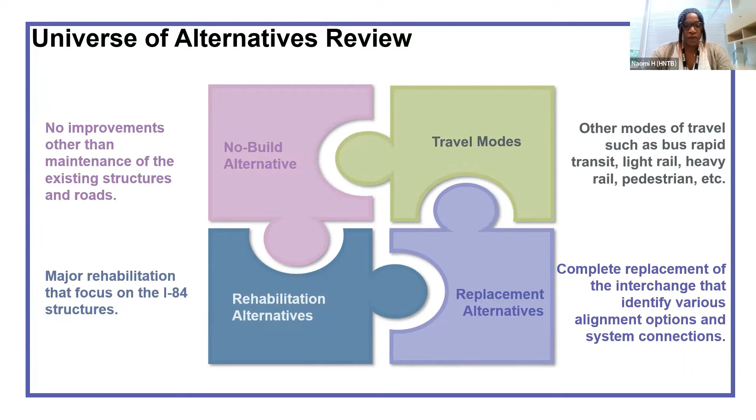23 alternatives have been identified in the universe of alternatives. As a group, we went through the features of each of the four groupings, highlighting opportunities, challenges, constraints, and considerations made in developing this universe. This resulted in many similar alternatives and some with very unique features. As David will describe, these alternatives were looked at somewhat like a Mr. Potato Head aspect, where you can add, subtract, mix and match certain features to develop full alternatives.

As the PEL study progresses, we will go through each of these alternatives in more detail. Today's meeting will focus on the alternatives that failed to pass this first level of screening. I want to remind everyone there will be two additional levels of screening after this one, and the public will also have a chance to provide input. These 23 alternatives were further broken down into more similar groupings, which we'll highlight as we get through this presentation.

The level 1 analysis was engineering based. We wanted to focus on the improvements possible for the identified deficiencies, the needs we identified, and the feasible solutions - the purpose of the project. We asked: can this conceptual alternative satisfy the purpose of the project, and are there any fatal flaws? We took the purpose and need, the transportation portion of it, and used this as the first gut check of the criteria. The potential community and environmental impacts many of you are interested in will occur in the two subsequent levels, but this initial level was purely engineering based and will be pass or fail.

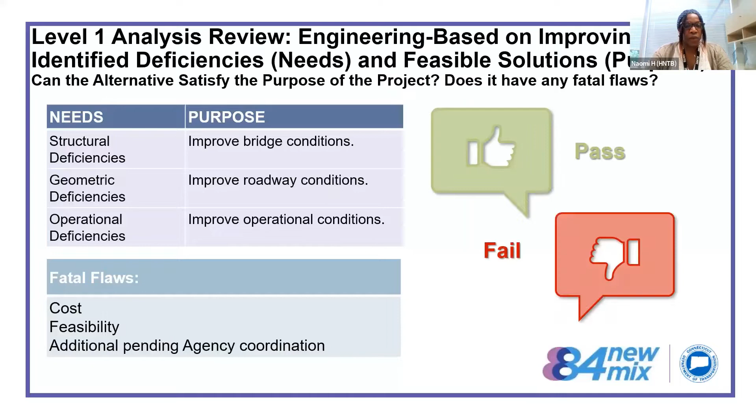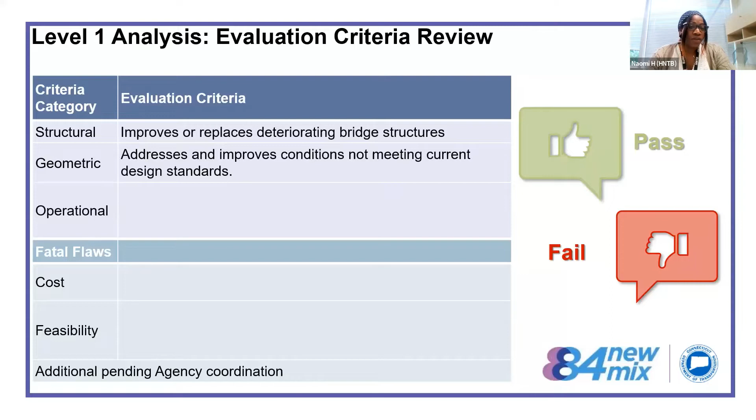The project team took the purpose and need and translated them into evaluation criteria. Beginning with the structural criteria, we evaluated whether the alternative improved or replaced the deteriorating bridge structures. For the geometric criteria, we wanted to make sure the alternative addresses and improves conditions that do not meet current design standards. For the operational criteria, we wanted to make sure the interchange would function with current traffic and future traffic projections.

So those high volume movements would be direct connections, meaning that you can go to either main line without needing to take an exit and use the local road network. The lower volume movements would be indirect connections, where you would use the local road network to make those connections. We also identified fatal flaws, and those fatal flaws were cost and feasibility.

I want to highlight that we have an agency coordination meeting tomorrow, where we will meet with federal and state agencies to get their feedback on any fatal flaws or additional goals and objectives that we can look at in the next subsequent screening levels.

For cost, we just wanted to make sure that financial resources could be made available for the alternative. And then for feasibility, we looked at if the alternative could be constructed using proven technology and techniques, general constructability aspects, as well as making sure that traffic could be allowed to operate during construction.

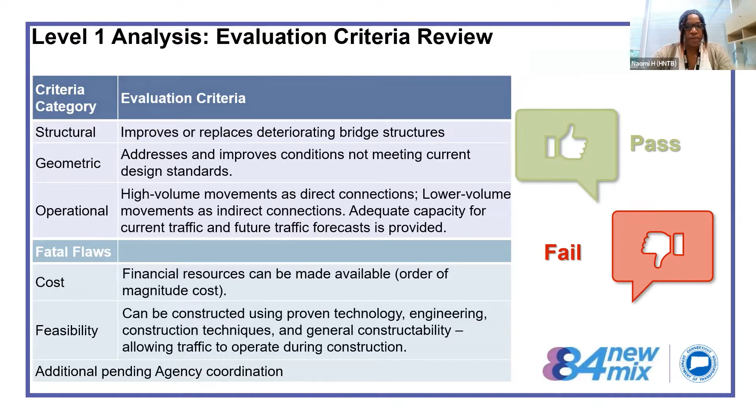So we'll get into those preliminary screening results. These are preliminary, not final, until we meet with the public. The PAC is ahead of the public, as you help us refine the information and present that key information to the public as well.

So 23 total conceptual alternatives were identified in the universe. 13 of those conceptual alternatives are proposed to be dismissed at this first level of screening, meaning that they failed to address the transportation need or are fatally flawed.

9 alternatives are proposed to advance, and these alternatives at this very early level appear to address the transportation need and are not fatally flawed. Those will move on into the next level where they will be further developed, more than just conceptual.

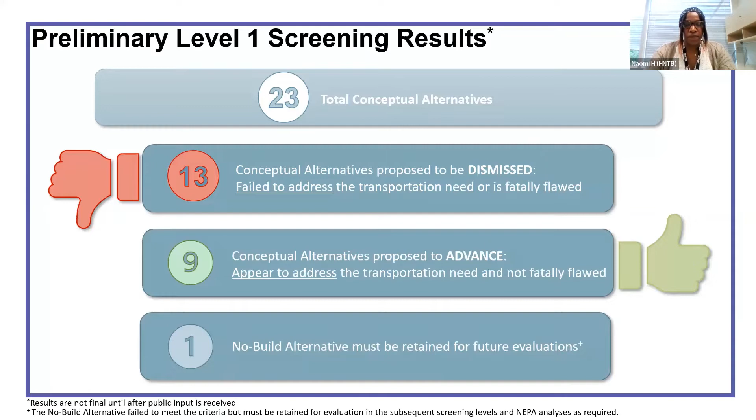So here are the screening results, or the groupings for the level 1 universe of alternatives. We've identified 4 major groupings: the no-build, travel modes, and the major I-84 rehabilitations. And then we have the replacement alternatives, which were broken down into some smaller groupings.

Reconstruction in place, full system interchanges, partial system interchanges, ground level options, and also bypass alignments. This is a sneak peek of how the alternatives will be grouped together in our level 1 report, and also on the website when we can put these up for additional public input and feedback.

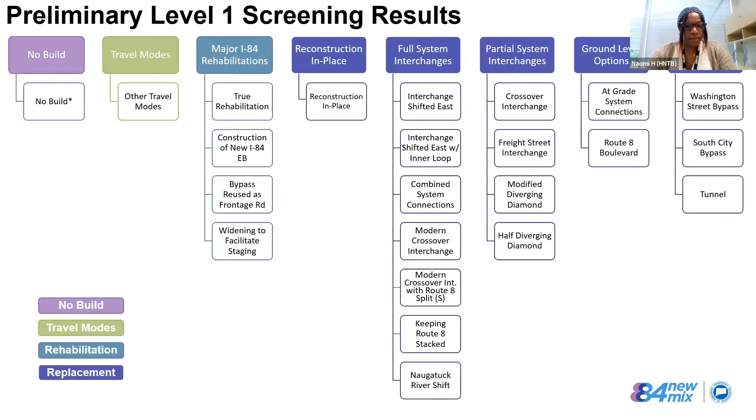Just as a reminder, any fail at this level of screening means that the alternative is proposed to be dismissed from further evaluation. I want to highlight that if it is dismissed at this level, we would not be seeing the alternative again in a future level of screening. So as we get into the core of the presentation, keep that in mind, and feel free to ask any questions about these alternatives.

Again, being in the PAC, you're slightly ahead of the public, so these are not final dismissed alternatives yet, but we are proposing for the ones that failed to be dismissed from further evaluation.

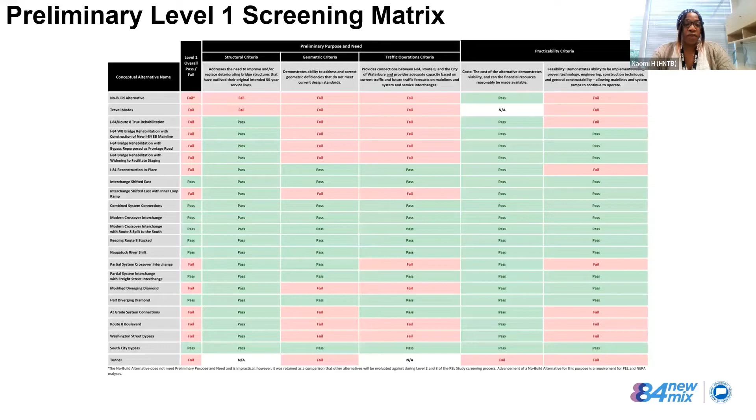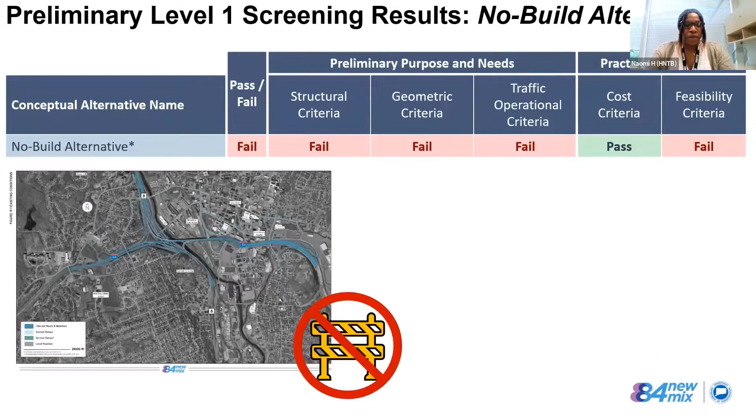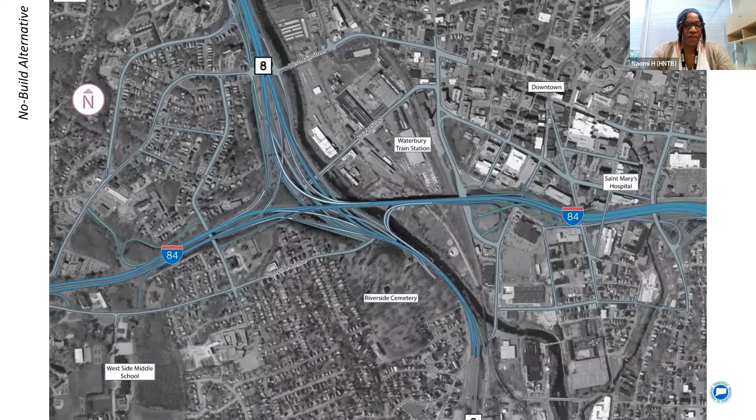To get into our results, I want to start with the no-build alternative. Again, the no-build is the existing interchange, no construction other than general maintenance activities will occur. If we zoom in on this graphic, it is just the interchange as it exists today. Nothing really changes. All of the deficiencies we've identified will continue to operate in a less than ideal manner. This would be our baseline condition, with no improvements of deficiencies.

As you can see, it failed to meet our preliminary purpose and need, and it also has some fatal flaws for the feasibility criteria. This no-build will be retained for further evaluation and subsequent levels, just for comparative analysis against any potential alternatives that continue to move forward and appear to be viable and reasonable.

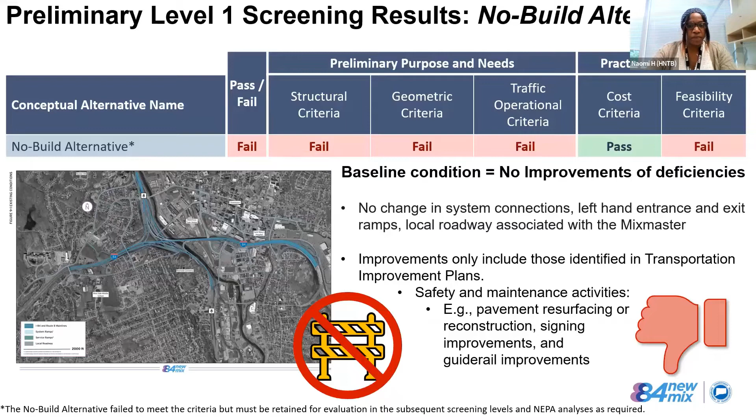Moving on, we have the travel modes. This includes bus transit, rapid transit, light rail, heavy rail, additional bus lanes, and pedestrian bicycle access and things like that. We want to highlight that the project team is aware of a lot of the government proposal directives and initiatives to reduce vehicle miles traveled, which could result in fewer cars on the road.

We want to highlight that Waterbury in this area is in a very unique situation, and this is a transportation project. So while a lot of these travel modes are a fail for the preliminary purpose and need statement and the feasibility criteria, I want to highlight that these other travel modes will be considered as potential complementary features. This is part of that Mr. Potato Head type of thing, where we can incorporate certain aspects into an alternative or support certain transit modes of travel in an alternative and move it forward, but it doesn't alone improve the deficiencies we've highlighted.

So while some reduction in congestion could be a possibility with additional modes of travel, we don't see it as actually fully satisfying the transportation needs in this area. But as I mentioned, it could be incorporated as a complementary feature for whatever the new mix ends up being.

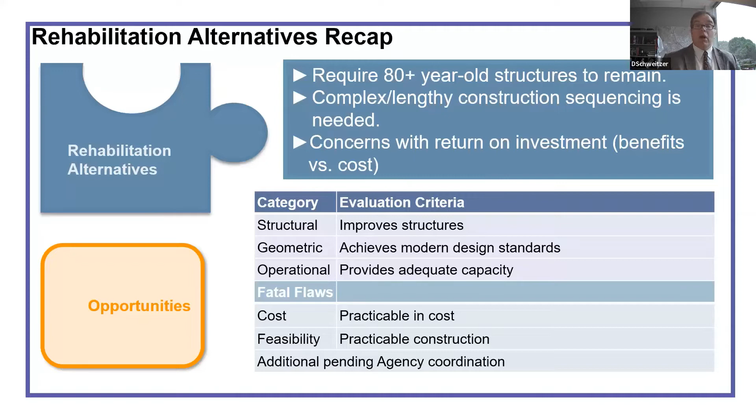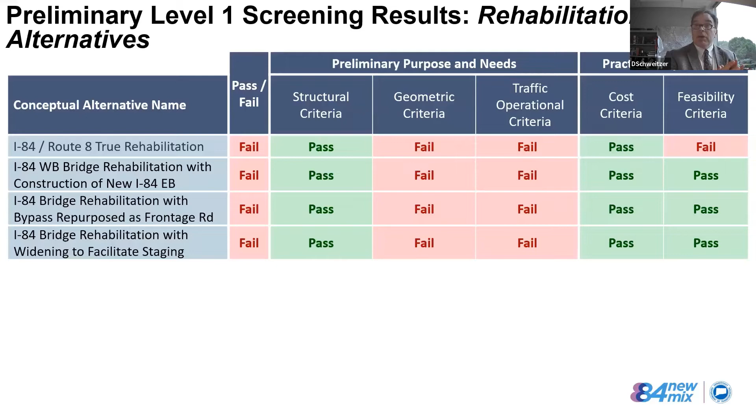Now as we get into the first alternate - oh, I'm sorry, we'll look at the recap of them. So here are the four of them. You can see their report cards, and we're going to get into each one of these four starting right now.

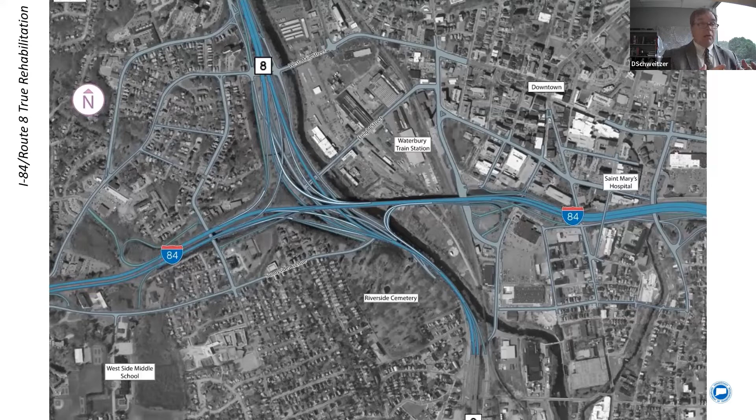The first one we're going to look at is the true rehab. What this will do is we will not be building new structure - you're looking at the core, we will rehab what is there, and at the end we will have the same project, the same footprint we have today. So while the structures will be improved, that being the concrete decks plus some steel and concrete repairs, we are not going to be making any geometric improvements, and we will not be improving the traffic operation.

So our level of service will still be at the same spot we were at, and we will experience a lot of delays during construction. So as you look at this report, you can see we fail on the geometric, our traffic operational, and the feasibility criteria is based on those traffic disruptions we'll have during construction. So this option was viewed as a fail.

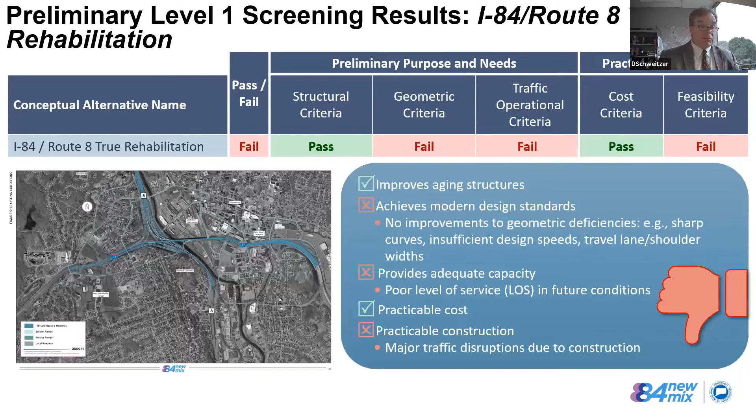The next option that we looked at was the I-84 westbound rehab while building a new I-84 eastbound.

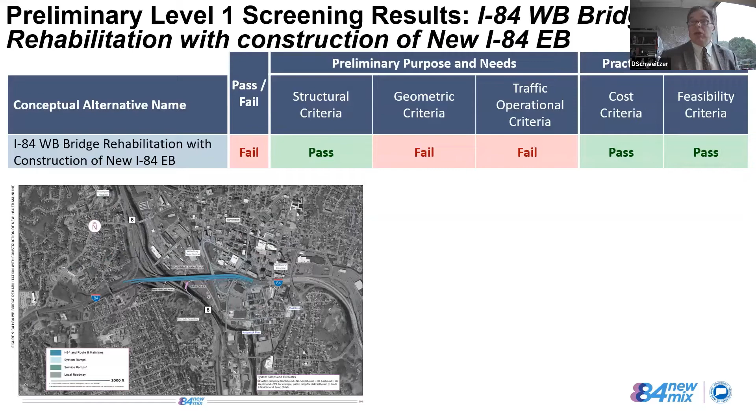As we zoom in on this, if you look at the cross section in the lower left, you can see that we have built a new eastbound barrel at the same elevation it is at today, to the south, so we'll be unstacking the bridges. This new eastbound structure will be overbuilt so it can handle bidirectional traffic during construction, so we'll put both eastbound and westbound up there.

Then we'll be able to remove the upper level of the existing structure and rehab the existing westbound, then return traffic as shown here, with eastbound on the new structure and westbound on its existing structure. So if we look back at the report card on this,

you can see that in the westbound direction, we're still going to have the same geometrics that are out there today that do not meet the modern criteria. We'll also have poor levels of service on the westbound. While traffic-wise, our constructability and maintaining traffic, there's a better plan in place for that.

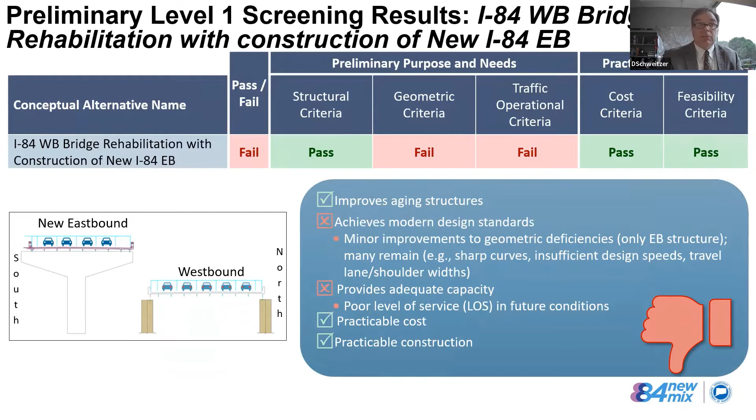This is still going to fail due to the geometric and traffic operational criteria. Okay, the next option to look at is the I-84 bridge rehab with a bypass roadway built, then repurposed as a frontage road.

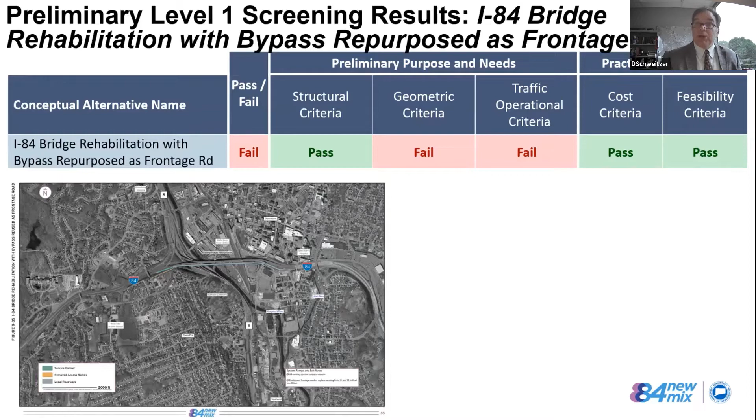As we zoom in on this, if you look at the cross section in the upper right-hand corner, what we look to do is build a bypass road to the south to handle the 84 traffic. And then we would put both the eastbound and westbound traffic on the structure while we rehab both eastbound and westbound bridges.

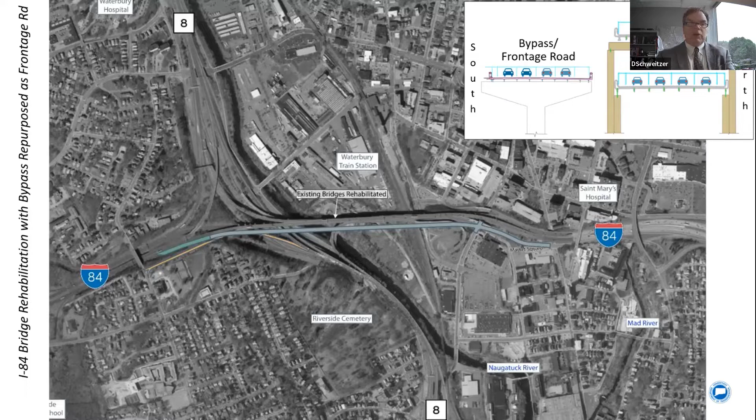Then at the end of the project, we would move the eastbound and westbound traffic back over to the existing structures. This bypass road would be converted to an eastbound frontage road where we'd take all the local traffic off and bring it down, in essence replacing exits 21 and 22 by having intersections with both Bank and then terminating at South Main Street.

So if we look at the report card on this, what we get is that yes, we're improving the structures because we're replacing those decks, but we're not designing to modern design standards. We're still failing geometrically, and we'd be back to our same levels of service on both the eastbound and the westbound. So this alternate is looked at as a fail.

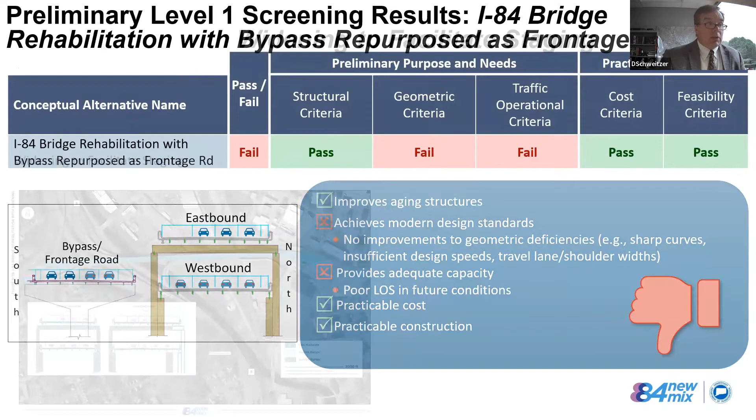The last rehab option that we looked at entails widening the structures to the north side so we could rehab them and stage our construction across.

So if we zoom in on this, you can see the existing conditions on the left side and what our final proposed conditions would look like on the right side. What we are doing is widening to the north side, extending out the stacked condition so that we can remove the upper portion of the existing northerly columns that are there.

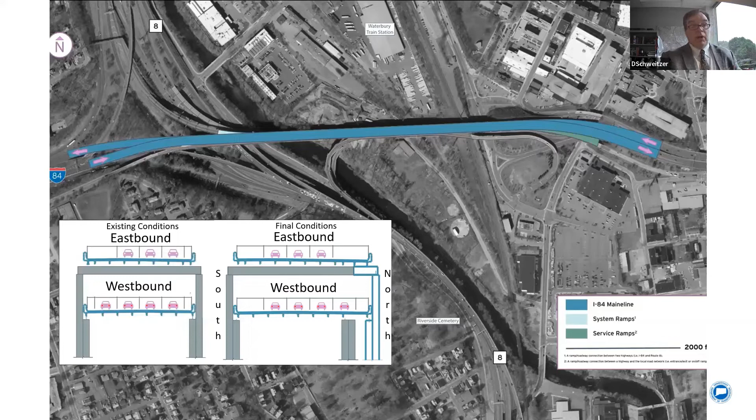We'd be able to build another full lane of traffic, and then we would stage our construction as we worked across rehabbing the bridge, so we'd have a lot of construction phases to be able to complete this. So now if we go to our report card on this,

what we are finding is that we're only making some minor improvements to our geometric deficiencies. We're not correcting all of them, so this would still be looked at as a fail. And from our traffic capacity, we're still not providing the adequate capacity. We have failing levels of service, so this is also viewed as a fail.

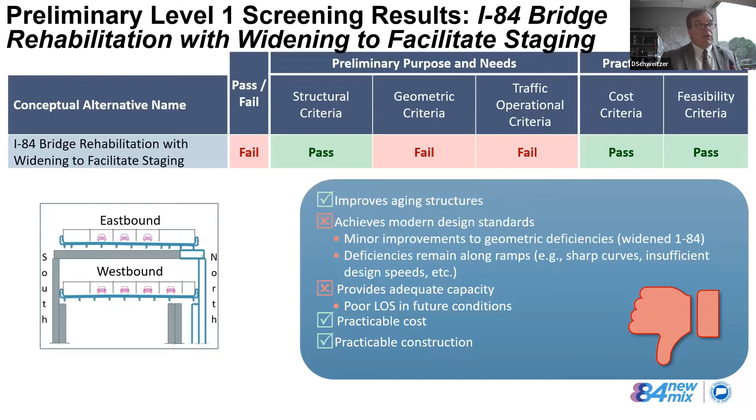So our next slide is looking back at these 4 rehab alternates. Just to stress, these rehabs are for all the bridges within the interchange, in both main lines and the system ramps, but we are focused a lot more on the I-84 structures as these structures have not had the decks replaced. As we came out, you can see that all 4 of these failed, mostly on the geometric and the traffic operational criteria, where they got failing grades.

While the structures are improved, the steel that is out there will only be patched. Consider it as a Band-Aid type of situation where we'd have to go back and continually maintain that steel. We don't really know how often yet, but the existing steel would essentially remain for these rehab options if they were to move forward, and that would result in some concerns, as David mentioned earlier, with that return on investment for these rehab alternatives.

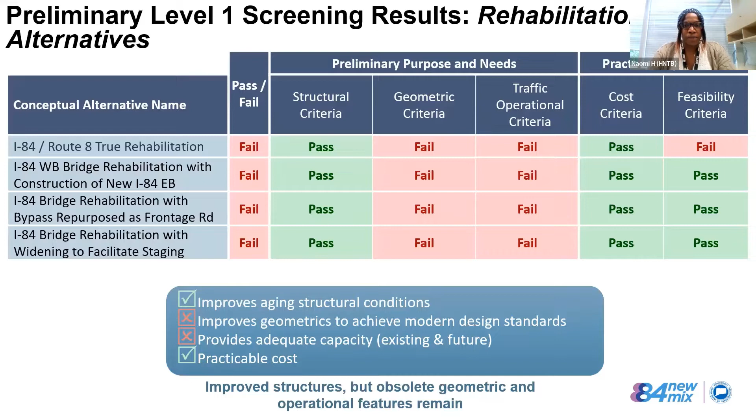Now we'll get into the replacement alternatives. Again, these are 8 of them that failed. One thing that goes on with these replacement alternates: we're looking at complete replacement of the I-84 and Route 8 structures. With those new main lines and new structures, we have all new connections, so we can get rid of those left-hand on and off ramps, and we can get rid of some of the sharper curvature and bring these up to modern design standards. So when you look at the needs and goals we have for this, we have a lot more opportunities to meet them.

Now, as we go into these replacement alternates, as designers we still have our concerns, constraints, and considerations as we go through this. Remember, we still have that high ridge line on the west side. We have the Naugatuck River, the Mad River, the rail line. You have to keep this topography in mind, and then other features, such as Union Station or the historic Riverside Cemetery, are all considerations for the designers as we go through this.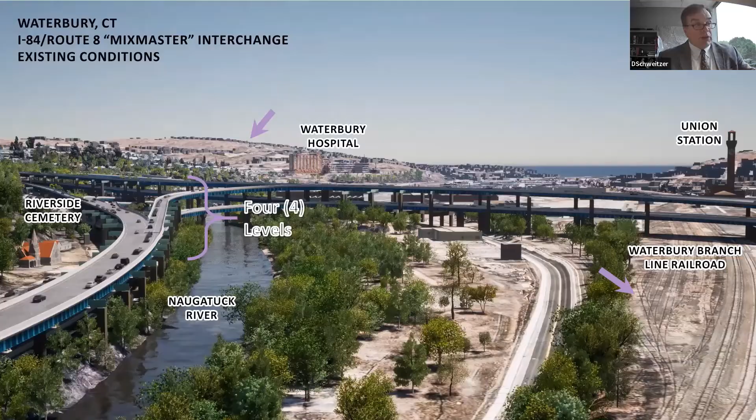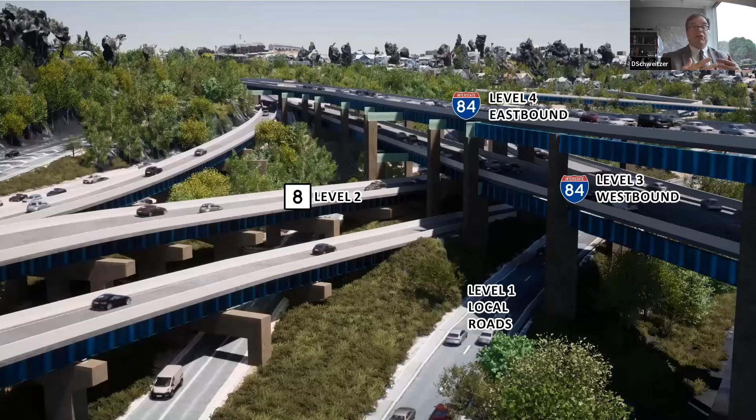One other thing to consider as we zoom in on the structures: remember the existing is a 4-level structure on this interchange, which helps separate traffic and makes all the existing movements possible out there. So these are all things as designers we were weighing while laying out these alternates.

Remember, with these alternates, everything is on the table. Nothing's been dismissed. Some ideas are tried, looked at, and evaluated, and they can fail out. As Naomi put it, it's like a Mr. Potato Head approach, where one feature looks great and we're going to advance that. Other features are looked at, analyzed, and then dismissed, and those aren't used again. So these are the 8 that we're going to look at.

You can see the report cards here, but we're going to get into each one of these individually right now, and there'll be things I'm explaining as we go through. If there are questions, please ask, pop it into the chat box—Naomi or somebody else will gladly interrupt me and we'll answer your question.

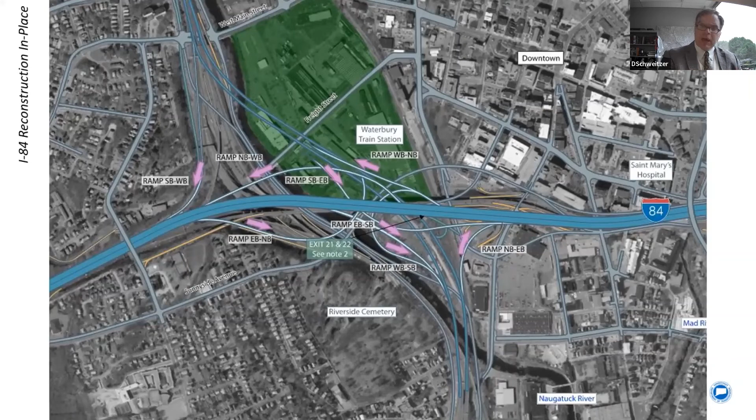The first one we're going to look at is I-84 reconstruction in place. If we zoom in on the core of this interchange, what we're looking to do is build I-84, unstack it, but build it back in its original footprint so we can minimize the amount of impacts and stay pretty close within the right-of-way that we have. What we're finding is that if we unstack this and build where we're at, we would have to find a way to handle this traffic—that was a big problem we had when looking through all the rehab alternates, how do you handle this I-84 traffic if you have to replace it? In this situation, we have to remove the existing viaduct in order to build the new one back in.

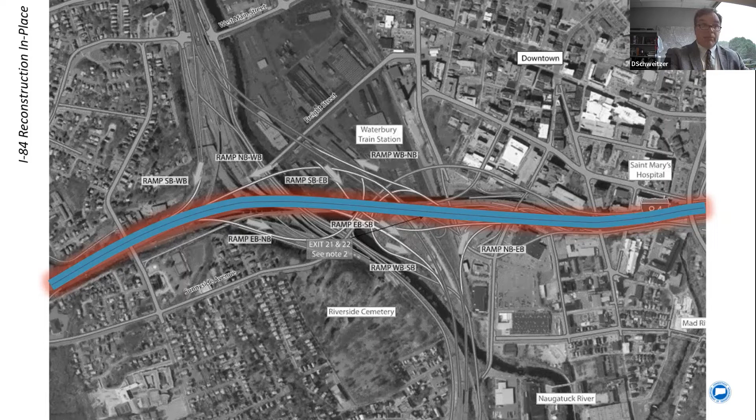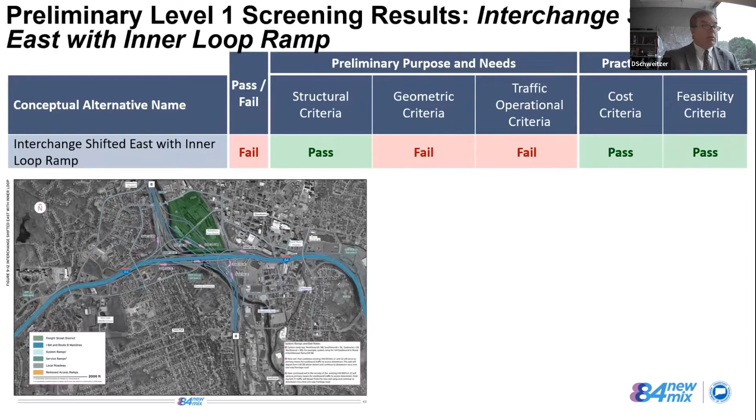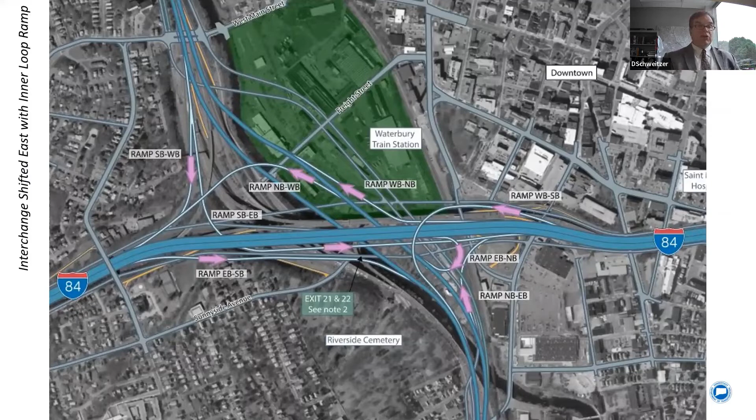Moving ahead to the next alternate: this is the interchange shifted to the east with an inner loop ramp. If we zoom in on this, at the core of the interchange we're showing I-84 constructed to the south of existing, so we can maintain the I-84 traffic on the existing structure. Route 8 could be maintained on its existing alignment as it's shifted to the east. It would still be a full system interchange with right-hand on and off ramps, but one thing we were looking at is the system movement from eastbound to northbound.

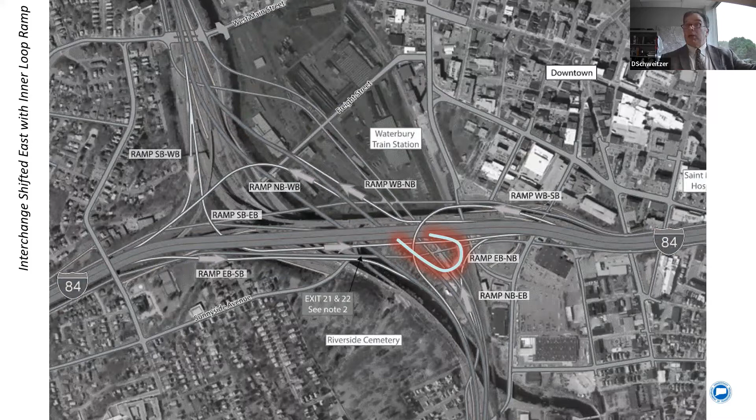As that exists today, that's a flyover movement, which means we go up a level over 84, and we have a lot of structure to carry it up to get up to Route 8 in the north of I-84, near the West Main Street area.

So what we looked at is a feature where we could take a right-hand off ramp and get an inner loop, meaning we take a tight radius ramp to pull it back and make that maneuver. So what we were finding is that, even though we were looking to save a lot of structure and make this a more feasible project, that inner loop ramp impacted the geometric operations on 84, and the tightness of that curve due to the constraints would not meet the geometric criteria.

So if we go forward to our report card, you can see that due to that inner loop ramp, this did not meet the geometric standards, nor did it provide the adequate capacity. So this option was looked at as a fail. Now, there are a lot of features with this that you will continue to see as we move forward and show some of these other alternates that were good features. This was just an alternate where it was looked at to see if there was something better that could be done, or something else that should be looked at on a certain movement to see if that improved the overall interchange.

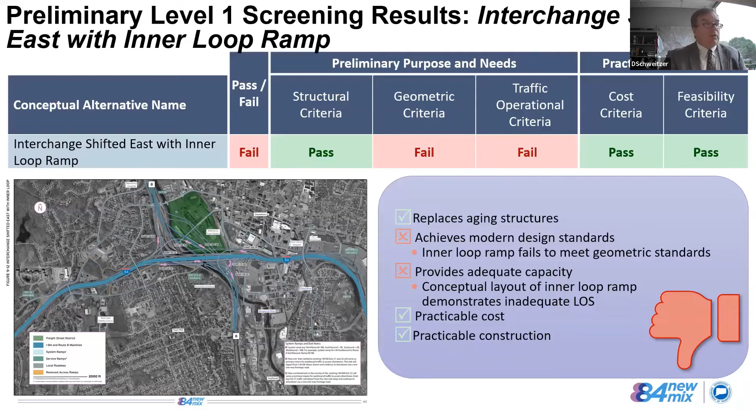All right, moving forward. We're going to get into the partial system crossover interchange.

As we zoom in on this, just a reminder, since it's been a number of months since we talked about these different features, this is a partial system crossover interchange. Now, what we're talking about there is the system movements. We have what are called our outer quad movements, which are system movements that connect mainline to mainline but don't have to cross a mainline. You can look at the northbound to eastbound movement -- it goes from northbound to eastbound but doesn't have to cross either 84 or Route 8 to complete the maneuver. So we don't consider those 4 outer quad movements.

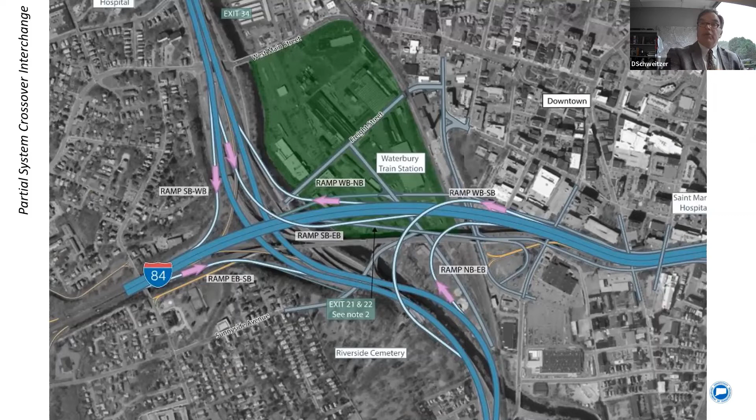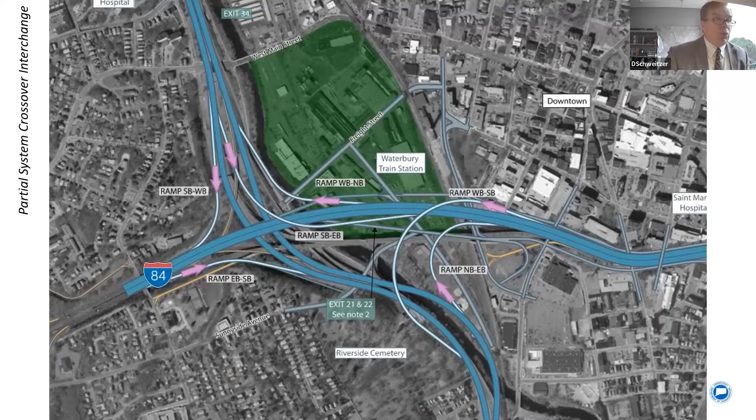What we're really focusing in on is the system movements that have to cross over or under Route 8 in order to make the connection to their destination. And 2 of the ramps here -- the reason this is called a partial system crossover interchange is that when we look at the traffic volumes, you have movements like the westbound to southbound or the southbound to eastbound, which are heavy traffic movements and couldn't be brought down to the local level. So they had to be direct connections. So what we're really looking at here is the eastbound to northbound or the northbound to westbound movements.

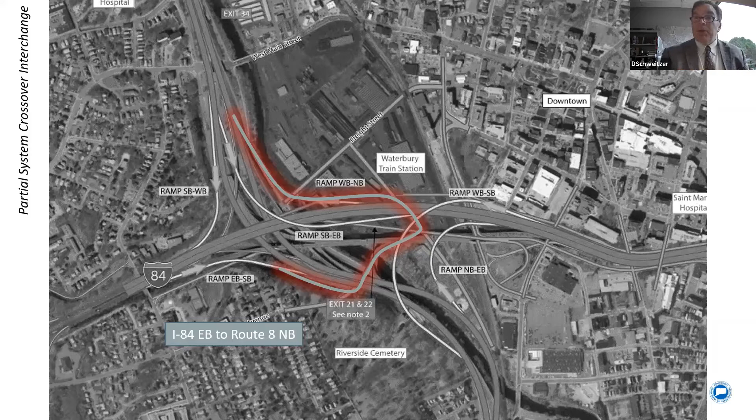And what we're finding is that when we brought this down to the local level with these 2 movements, the traffic operations would fail. Now, one other feature I wanted to point out is that with this option, we looked at constructing I-84 to the north of the existing structure. In addition to some additional right-of-way impacts, we're also finding that there were issues with the constructability on how we could make this work.

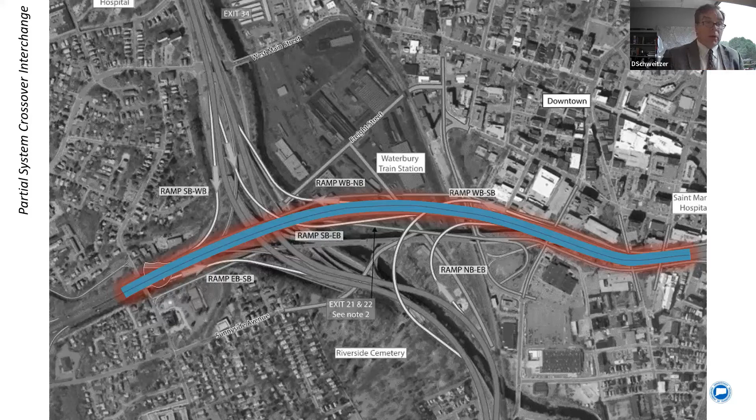So if you go back to the report card, we found that the indirect connections and using the local roadway network to complete those connections did not provide the proper level of service that we needed for the traffic. And also this moving of, or rebuilding, I-84 to the north -- unstacking it and building it to the north -- resulted in some constructability issues. So overall, we found that this alternate failed based on those 2 criteria.

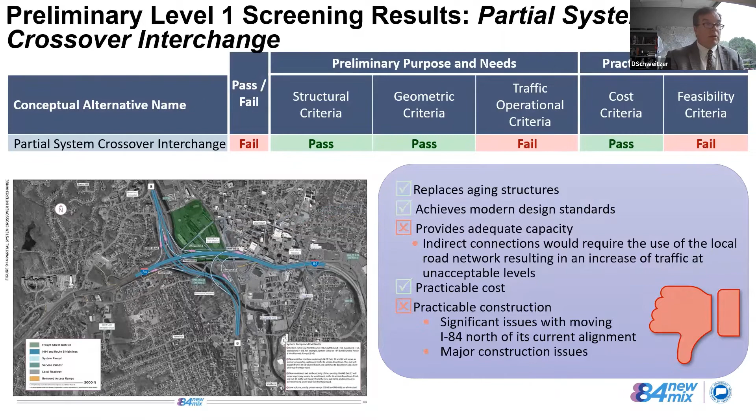All right, the next alternate -- and I think we're going to have a little bit of a video on this when we get there -- but this is on a modified diverging diamond. As we zoom in on this, a diverging diamond is a relatively new type of interchange that was brought forward, and it's a little bit counterintuitive because you get contraflow. As you can see here, you'd be shifting over to the left side of the roadway as the video is playing here.

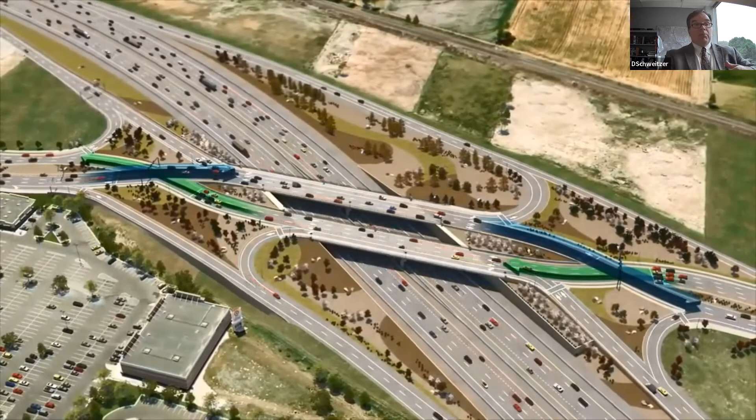And what this would do is reduce the amount of signals or traffic control you would need in order to complete an interchange, because instead of a left-hand movement across traffic where you'd have to wait for a clearance or have a protected movement, by flipping to the opposite sides of the roadways, your left-hand movements now become more free flow.

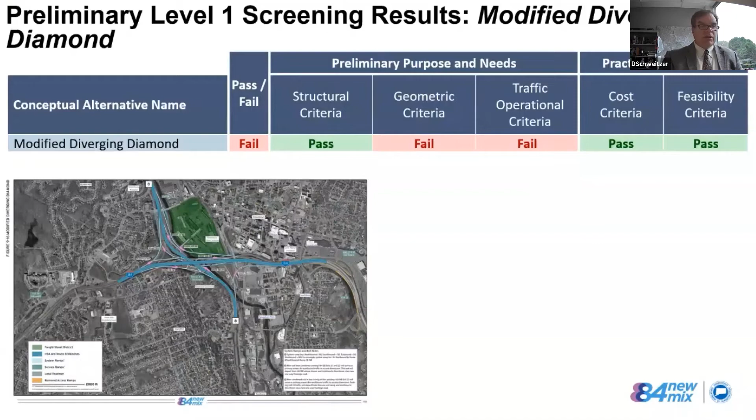So if we zoom back to look at the core of the interchange, what we're finding is that with this modified diverging diamond, that's because we could not do this with the actual main lines. The actual main lines would be through movements. What we're looking at is the 4 crossover system movements. The outer quad system movements would remain as direct connections, but we'd look to take these 4 crossover system movements and bring these into this diverging diamond type of alignment.

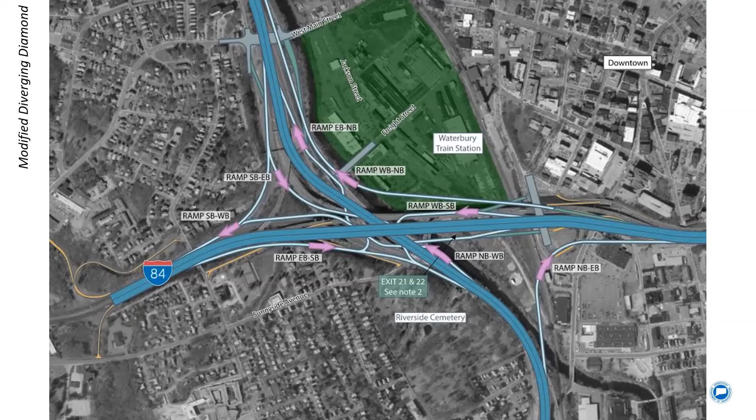And what this was finding then is that we would have traffic signals being installed at the intersections of these system connections. And as we talked about in the previous alternate, where we had a partial system interchange, because we had 2 of the movements that had very heavy traffic flows, that is where we were finding this option to be failing. Those heavy system movements, specifically the southbound to eastbound and the westbound to southbound movements, we would get a very poor level of service on these system movements due to this type of alignment.

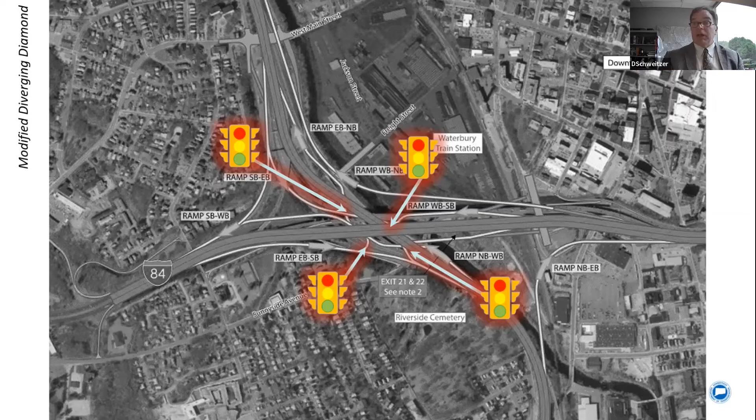So if we look at our report card, what we're finding is that this DDI, or diverging diamond interchange, the geometry of some of these ramps would not meet current design standards. We also found that the level of service or our operations would fail due to the heavy volume on 2 of these system movements. So therefore, while it's a newer idea and something that needs to be looked at, our analysis showed that this failed.

All right, just checking to see if there are any questions. There's a lot to digest on that one there.

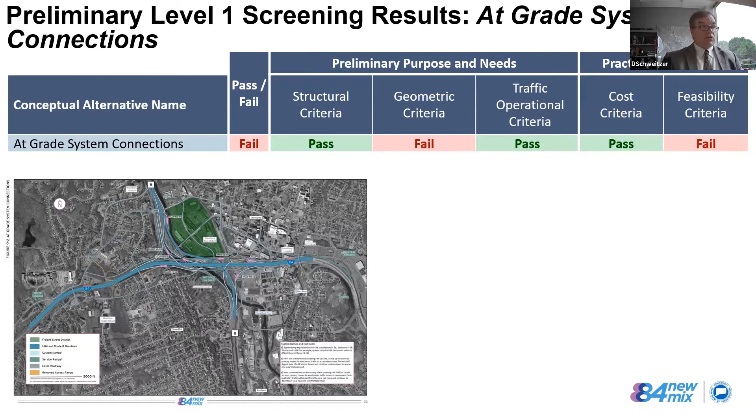So the next one that we're going to look at is the at-grade system connections. So as we zoom in on this, again we're back to looking at the core of the interchange. And again, you're going to notice we're building 84 to the south of existing. That seemed to align properly with how the roadway gives us our best geometrics. And we found that it met our structural criteria that we had. And with this, we have our outer quad movements, our system connections still taking place.

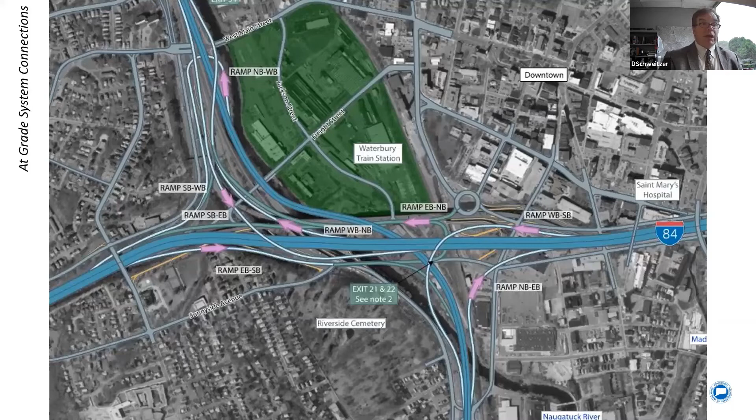You'll find that the heavier system movements that we found, particularly the southbound to eastbound and the westbound to southbound, are also direct connections in this due to their traffic volumes. But again, it's those 2 other system movements that have the lower traffic volumes, the eastbound to northbound and the northbound to westbound movements, that we looked at to bring down to the local level and try to see if they could be combined with the local traffic and give us good traffic operations.

And what we are finding is that the Route 8 northbound to I-84 westbound, we'd be installing what is called a Texas U-turn movement, which, as it's highlighted up here, would take place just before the intersection with West Main Street. And with any Texas U-turn, what you do is you exit your traffic to the left, so you're not bringing them up to the traffic control.

So they would get a free flow movement off of the roadway, and then they would get a left-hand merge. In this case, they would be onto the system movement looking to get onto westbound. So then they would get a left-hand merge onto the other system movement. So what you're trying to do is take that movement and avoid bringing them through the traffic controlled intersection, to give them free flow movement. So that is what a Texas U-turn is. So we looked at the function of a Texas U-turn with that movement.

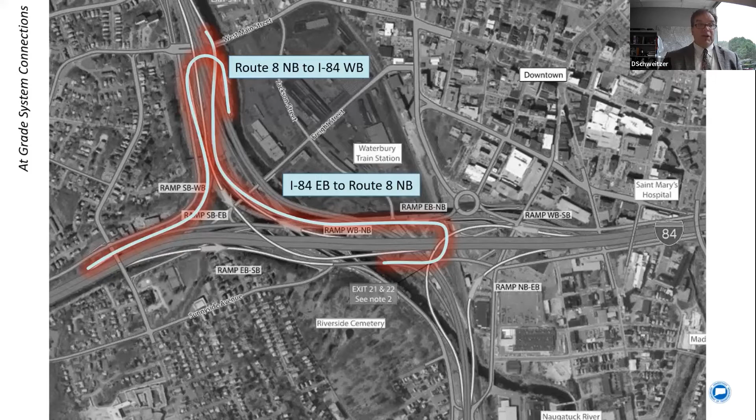And then if we look at the eastbound to northbound, we also looked at that. But what this did is, instead of bringing this up to the intersection with Meadow, we tried to keep it to the west side of the existing railroad. And what we were finding here is we were having issues with the vertical alignment of this ramp due to the railroad.

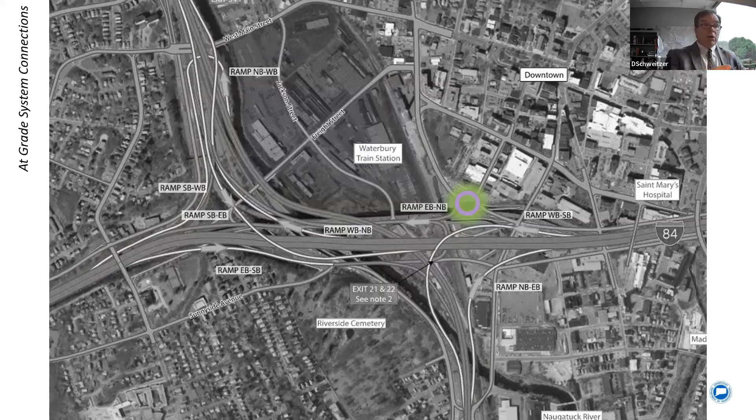And I think one other feature we wanted to point out on this alternate is this was one where we looked at the use of a roundabout within the city, at the intersection with Meadow and Freight and the westbound frontage road. This was a feature that showed some promise, looked to function well, and that feature is brought forward into other alternates.

But overall, this alternate, as we go to the report card, is going to show to fail. And when we get there, you see it failed on geometric criteria, that's a lot to do with the westbound, the eastbound to northbound system movement. But we were finding that it did have better traffic operational capacity with those system movements, how we set them up. And then also we had trouble with constructability due to topography and I-84 and the location of the railroad.

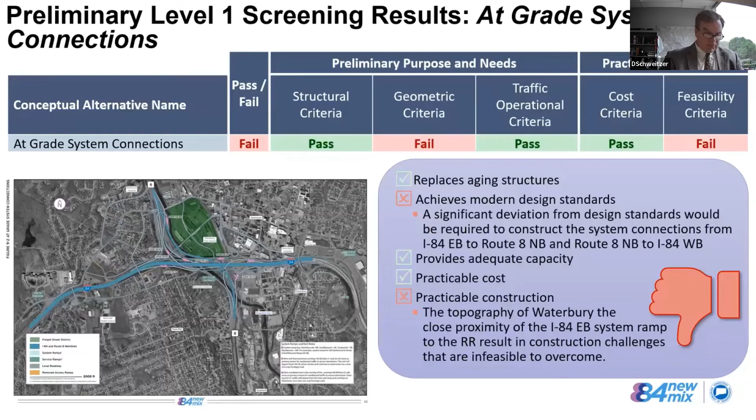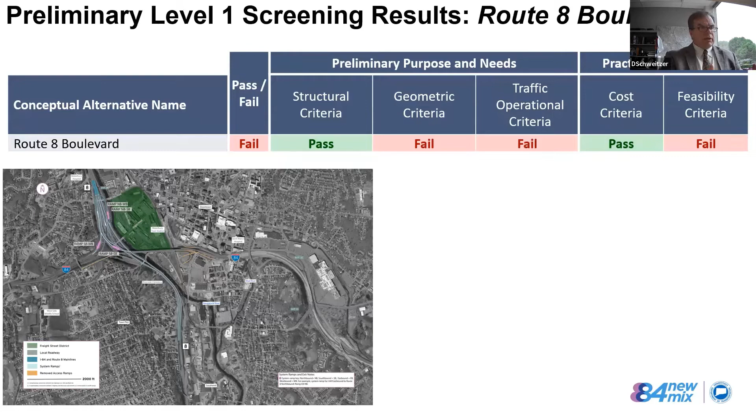All right, next alternate. This alternate was looking at taking Route 8 and making a boulevard out of it. What we'd look to do is get down into the core of the interchange, take Route 8 and bring it back down to grade after the 5th Street bridge to the south. Then we'd have at-grade intersections with Washington, with Bank, with Sunnyside, and with Freight. And then we'd look to climb back up, so we'd have a grade separated intersection.

We'd have a grade separation with West Main Street, combined with the local traffic for that stretch of roadway. So Riverside and Route 8 would be combined, have those traffic signals, very similar to how Route 9 is set up in Middletown. And then we'd look to have our system connections to the north of I-84.

Now, as we looked at this and got the analysis, again, it's something that needed to be looked at. You're always looking to improve your roadways, or seeing if a complete streets type of idea would work in a situation like this. We're finding this didn't work and it failed. But again, it was an alternate that needed to be looked at.

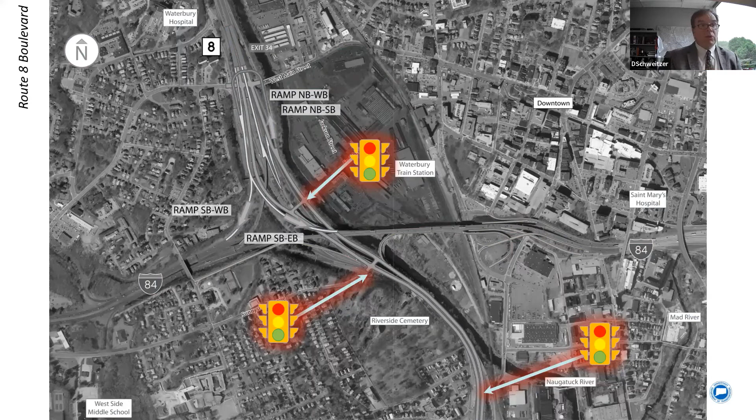As we go to our report card, you'll see that geometrically, we did not achieve modern design standards. Our traffic operational criteria would fail a lot along Route 8. And this would require, constructability-wise, we were also finding a lot of issues with that. So this alternate failed.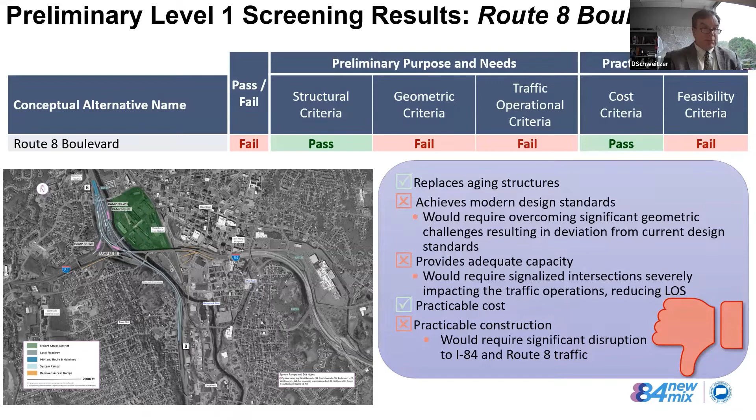All right, moving on. Next, we're going to look at the two bypass options that we looked at and that failed out at the level 1 criteria. The first one is the Washington Street bypass. And as we zoom in on this, you'll see that there'd be a portion of I-84 that would remain as a business loop. The existing route to the north through the city would remain as what we'd call a business loop.

But I-84 would bend to the south and combine with Route 8. So we'd have a section there, basically between existing I-84 and Washington Street, that would be a 10-lane, 5 lanes in each direction, combined highway. Then I-84 would break off and would look to carry through where the Washington Street, Washington Avenue corridor is today, and then combine back in with I-84 to the east.

Now, even at level 1, not going any further than that, but looking at the level 1 criteria, this option failed. What we were finding is the first issue we looked at was the vertical constraints down and along the railroad, being able to carry through with Route 8 northbound and to make the connections for 84 coming over and getting into that east-west corridor through the Washington Avenue corridor. So we had our vertical constraints there.

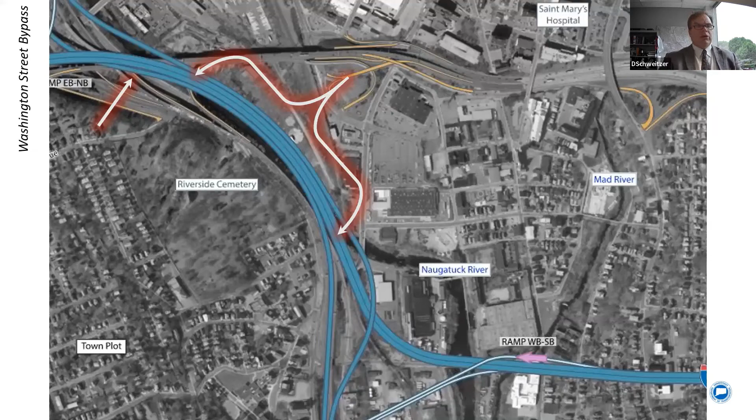So if we go to our report card, what we're finding is that this failed on the geometric criteria. It also failed on the traffic operational criteria. And then we were also finding constructability issues. So this alternate failed and is not advancing forward. All right.

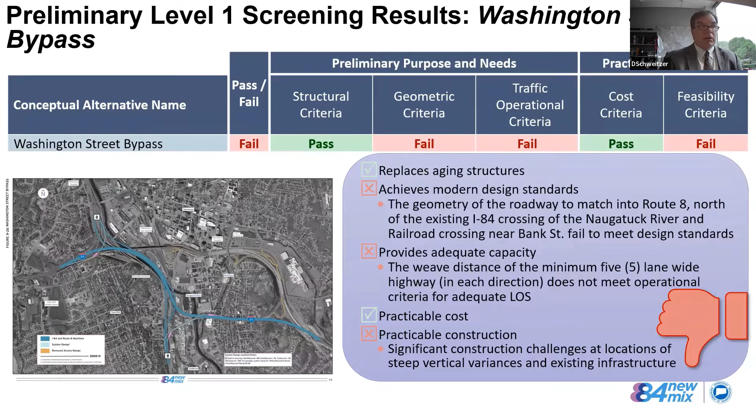The last alternate that failed, and this is a replacement alternate, is a tunnel concept. With the tunnel, we'd look to take a portion of the roadway. If we look at the core of the interchange, taking a tunnel through here, we'd have a lot of topography to deal with. So that really constrains what could be done with a tunnel, plus making all of our system connections. So a tunnel concept would not advance because we're not meeting our modern design standards, the cost would be unreasonable, and we'd have significant challenges with our topography.

One thing we would look at and consider as a complementary feature is not a tunnel as we think about it, but more of a depressed expressway section, then build over top of the expressway, in effect creating a tunnel. This is something we looked at further east on I-84 between South Elm Street and Baldwin, as possibly being able to build over and recapture some space over the highway as we put I-84 into a tunnel.

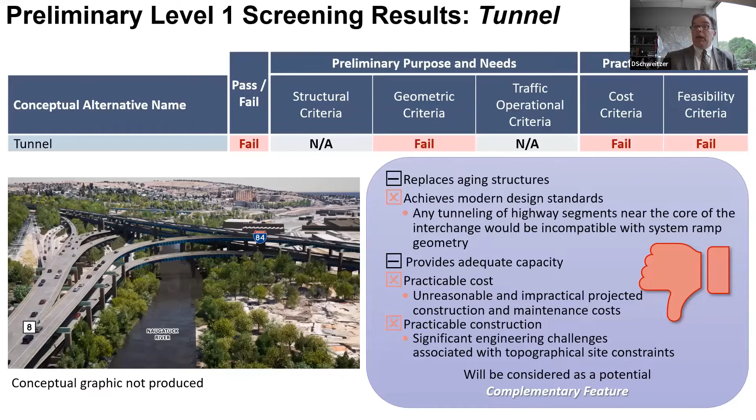So now as we go forward looking at these, I want to pause again and see if there are any questions, or if any popped up in the chat box.

Okay, we'll be here if anything comes up, if there are any questions.

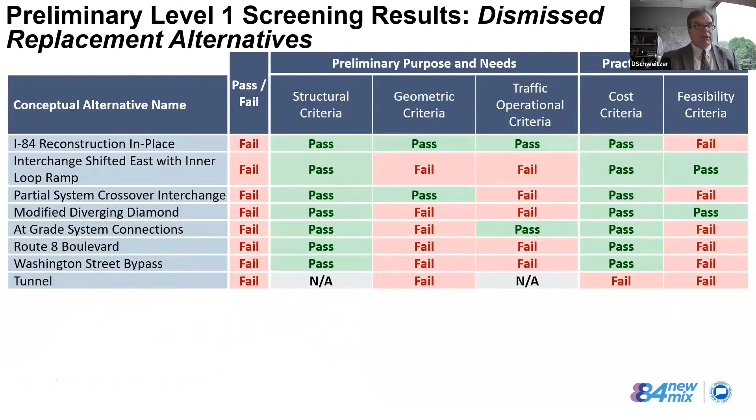So our next slide, I think of this where I turn it back to you, Naomi, or do I still have more to go through? No, this is all you. Yeah, this will be me.

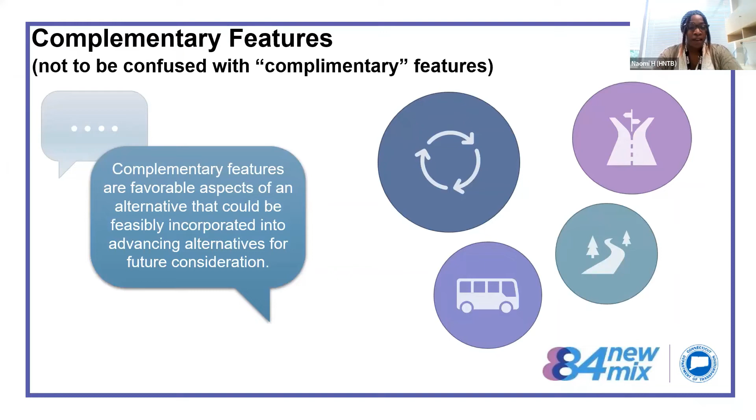Before we wrap this up, I want to touch upon some of the complementary features. Complementary features are those favorable aspects of the alternative that could be feasibly incorporated into any of the advancing alternatives for further consideration. David mentioned a few, including tunneling limited portions of the main line, the I-84 main line - that's the capping concept of putting a lid over a depressed segment of the highway.

A lot of local road improvements to improve how the main lines interact with the local road, incorporating a fifth crossing of the Naugatuck River, roundabouts within the city of Waterbury, and other modes of travel. There are a few more we have not specifically touched upon, such as moving the main line, like I-84, to the south. These are some of the unique complementary features you may continue to see as we carry them forward where feasible into the advancing alternatives.

I do want to note that additional features could be identified as this PEL study progresses and as more design is completed during the PEL study.

I wanted to highlight the 9 alternatives proposed to advance into the level 2 screening, where they will be developed with more detail. We'll get into additional considerations and criteria at the level 2 analysis, including more information about urban design, community, and environmental considerations. These conceptual alternatives that pass this initial level of screening will be called initial alternatives, to be further evaluated in level 2 screening.

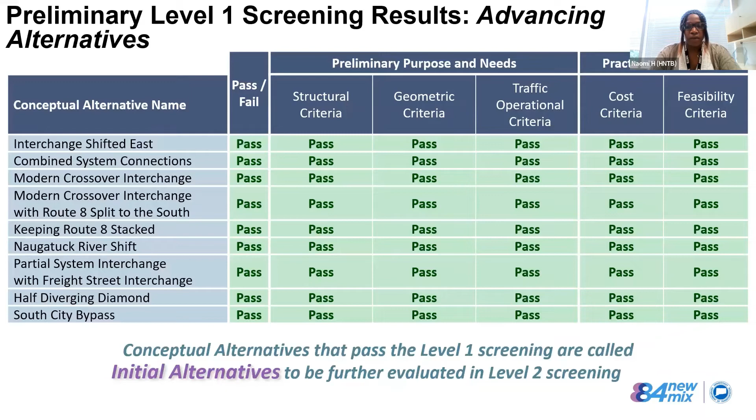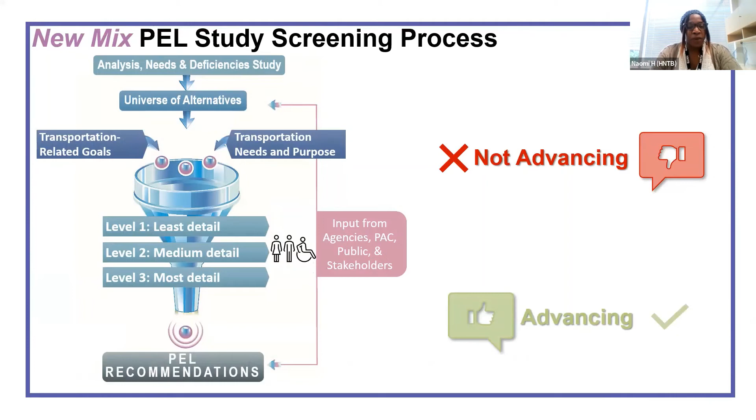Just as a quick reminder, this is our familiar funnel graphic for our screening process. We have 3 levels of screening proposed for the New Mix PEL study, trying to identify those PEL recommendations or the range of reasonable alternatives. While this first level of screening was either pass or fail, as we continue in the screening process it'll get more detailed - it won't be as cut and dry. There will be alternatives that advance, and we'd propose not to advance others, based on the benefits or negative impacts alternatives may exhibit as we continue to develop and identify more information.

Good morning, I just have one quick question or comment. Mark Nielsen with NVCOG. A lot of information, very detailed. I appreciate it. There's a lot of work that went into coming up with these alternatives and assessing the pros, cons, and coming up with the pass fail.

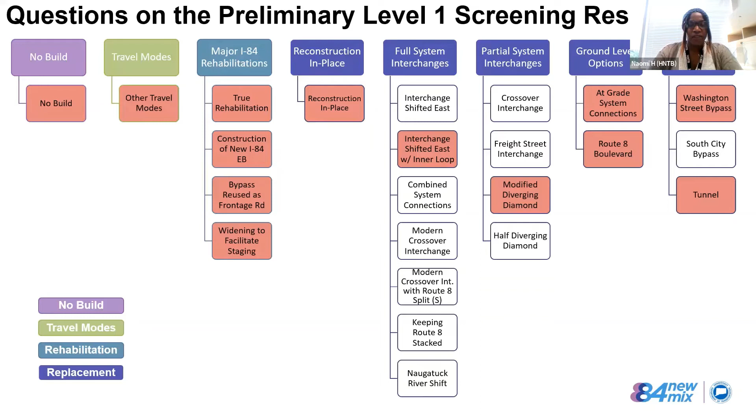Right, okay. So, and again, I think that's a big determination, because it's always been sort of thought that was always going to be a possibility of the complete reconstruction of the interchange, essentially in place and destacking the facility. Not that, again, I understand through your analysis it is kind of a difficult thing to actually achieve, and we all know that. I also think the pass that was given for the cost may be off too, because that was going to probably be the most expensive alternative out there.

So on the cost criteria, I'm not sure if I would have passed it, but it's just a comment. Just so I understand, we're looking at a number of other alternatives, but that now won't include the full reconstruction of the facility in place?

Mark, yeah, if you look at a bunch of the alternates, even a lot of them where we reconstructed I-84 to the south, we're not very far to the south from the existing, we're very tight to it. What was being found by the designers is that we were able to maintain traffic on the existing viaduct. We would lose some of the system connections during construction, but by building just to the south, we'd be able to keep the main lines open. It was meeting our constructability analysis, we were able to, it would work. So that was one thing we looked at.

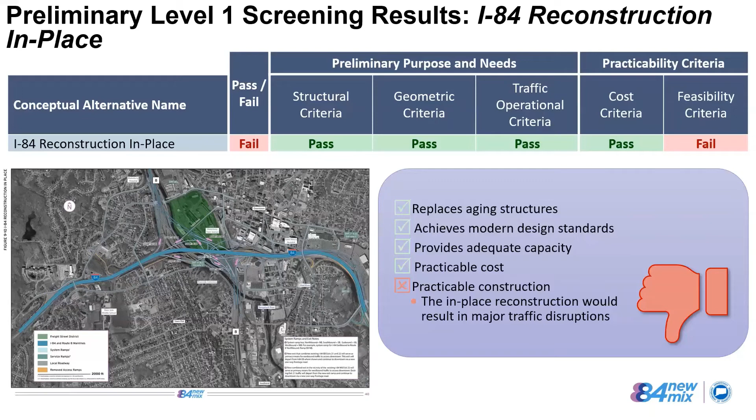All right, thanks. Like I said, it's just a lot of information to digest. Again, I think the way you're presenting it is good, and it really demonstrates a lot of effort that went into the analysis, so I appreciate that. And like you said, it's still a work in progress, so still a lot of decisions to be made.

Absolutely, and I did want to also state for the cost criteria, because we didn't perform a true cost benefit analysis at this level, just because it is so high level, we really just looked at if funds could be made available for an alternative. So as we progress in the PEL study, I believe the third level of screening is where we'll have the most detailed cost analysis available on the remaining alternatives to see exactly what we are anticipating the cost to be for the advancing alternatives.

Naomi, we do have a question in the chat box. Yes, I did notice that from Ms. Elm. Is it possible that none of the remaining alternatives would pass in the level 3 analysis?

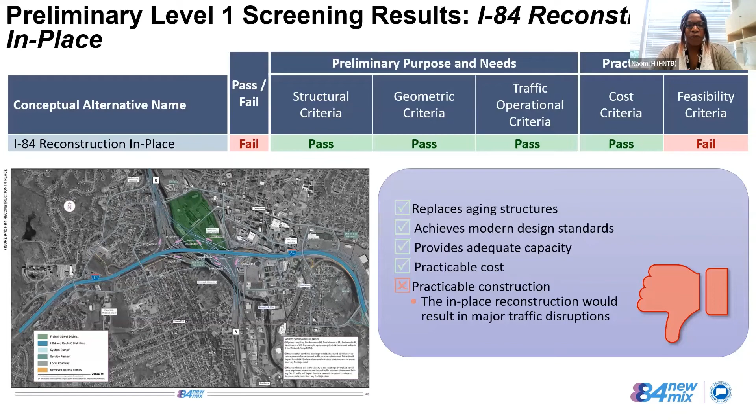So as I mentioned, the analysis as we move forward in this screening will become a little bit more nuanced and won't be as cut and dry as this initial analysis. So we'll be looking at options that are more beneficial and less beneficial. If it's determined that there are fatal flaws that remain in some alternatives, those may fail, but we don't anticipate having no alternatives remaining at the end of the PEL study.

We're hoping to conclude this PEL study with a range of reasonable alternatives. So there still are anticipated to be impacts or benefits and some negatives with the groups of alternatives that may advance into the NEPA phase after the PEL study, but we're not anticipating that there won't be any alternatives at the end of this PEL study.